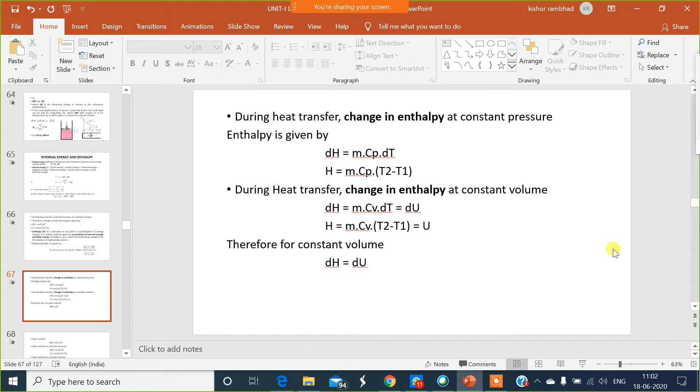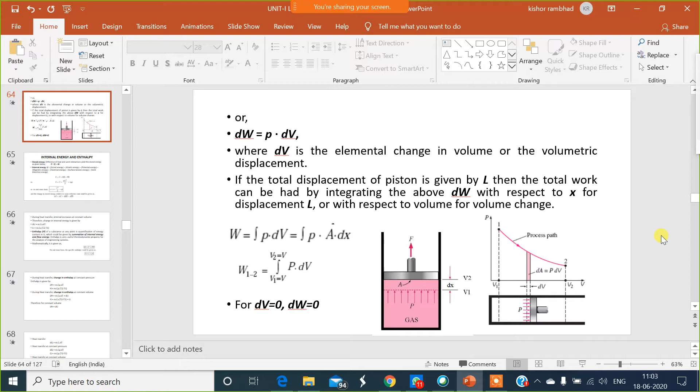Till last lecture, we have studied the work done and expression for work done for closed system. Now we'll study internal energy and enthalpy.

What is internal energy? Internal energy is a type of stored energy. And what is stored energy? Stored energy is the internal energy plus external energy. If we subtract external energy from stored energy, we get internal energy.

Now, how does stored energy get induced in the body? We merely consider external energy as the potential energy and the kinetic energy. Potential energy is the energy possessed by the body by virtue of its position. Kinetic energy is the energy possessed by the body by virtue of its motion.

Now, what is internal energy? Suppose there is a block and we are pushing it, applying some force, but that block is not moving. Even though we are applying some force, the block is not moving because it itself applies some force in the opposite direction, and that opposing force is called internal energy.

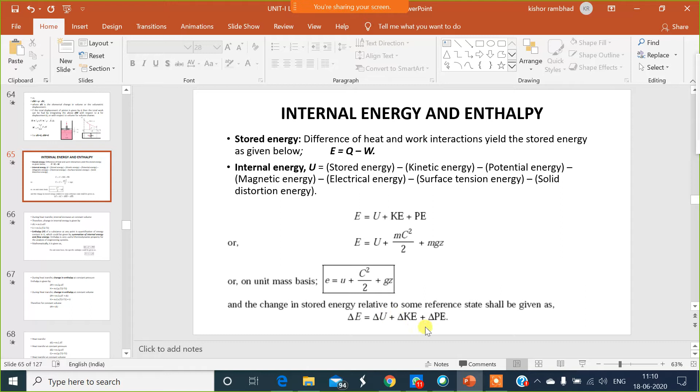During heat transfer, internal energy increases at constant volume. Listen, internal energy increases only when there is constant volume. Once the volume starts changing, internal energy stops changing this way. Therefore, change in internal energy is given by du equals m cv dt.

I told you internal energy changes only when there is constant volume, but internal energy increases or decreases because of the change in temperature. Suppose volume is constant and temperature is also constant, internal energy will also remain constant and will not change. Therefore, internal energy is a function of temperature.

Also, the change in internal energy depends upon the content, meaning mass, and the specific heat of that substance. Specific heat of a substance means its ability to carry heat.

If we define specific heat, there are two types: specific heat at constant volume and specific heat at constant pressure. Specific heat at constant volume is written as Cv, and specific heat at constant pressure is written as Cp. You might have studied this in 12th standard. Let me define specific heat.

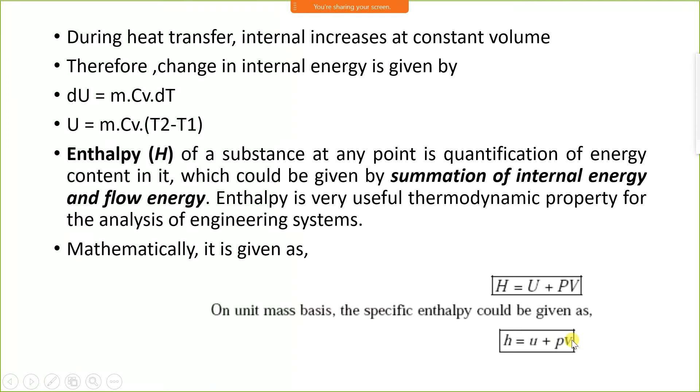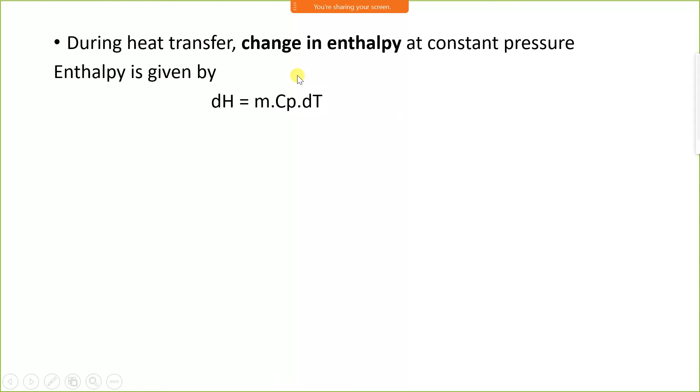During the heat transfer, change in enthalpy at constant pressure. We can supply heat at constant pressure or at constant volume. Therefore, change in enthalpy at constant pressure will be given by dH equals mCp dt. Cp is the specific heat at constant pressure, the amount of heat required to raise the temperature of a unit mass of a substance by 1 degree Celsius at constant pressure. If we integrate mCp dt, we get H equals mCp times T2 minus T1.

During the heat transfer, change in enthalpy at constant volume. At constant volume, it will be mCv dt, and mCv dt equals du, or we can write H equals mCv dt, T2 minus T1, which equals u. At constant volume, change in enthalpy is equal to change in internal energy, but at constant pressure it is different.

Therefore, at constant volume, dH is equal to du.

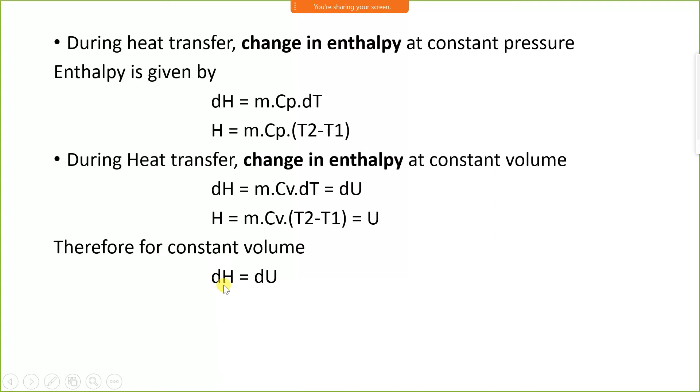Heat transfer is equal to dq, mc into dt. M is the mass of substance, C is the specific heat, dt is the change in temperature. But the value of C depends upon the type of process, whether it is a constant volume process. If it is constant volume process, we take C as Cv. If it is constant pressure process, we take C as Cp.

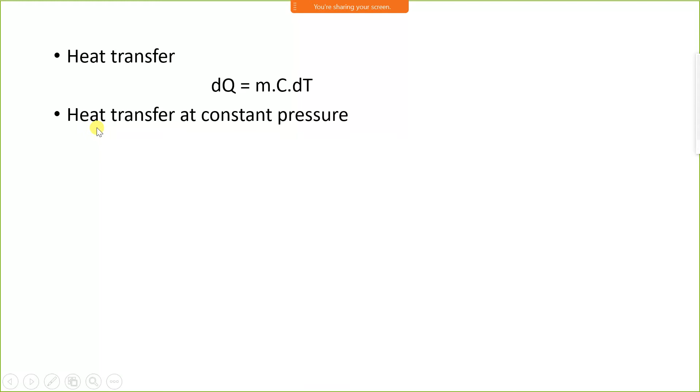For heat transfer at constant pressure, dq equals mCp dt, so q equals mCp times T2 minus T1. At constant volume process, dq equals mCv dt, which equals mCv times T2 minus T1.

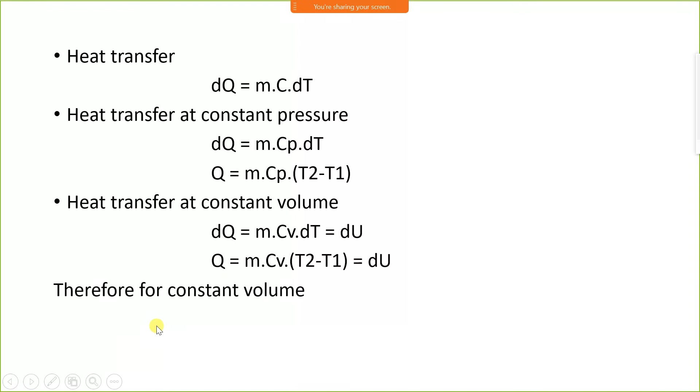At constant volume process, heat supplied is equal to change in internal energy. If the volume is constant, there is no work done. Therefore, q equals du plus w, and w is 0. Therefore, q equals du. So for constant volume, dq is equal to du.

Now we will study the steady flow system and its analysis. In this, we will study the steady flow energy equation, which is called SFEE.

Consider a system. It is an open system. What is called an open system? The system in which energy and mass crosses the boundary. Consider this is the boundary of a system. This rectangular block is the system boundary. Here, the working substance enters and the working substance leaves. Therefore, it is an open system. In an open system, mass and energy both enter and leave the system.

Here, the mass and energy are entering, and from here, energy and mass of the system are leaving. Fluid is entering at a particular height Z1 and leaving at a particular height Z2. Therefore, its height of entering and leaving is Z2 minus Z1. Heat is also entering, and as heat is entering, it is giving some work done.

At the entry of the fluid, it has properties: density as ρ1, velocity as c1, area as a1. At the outlet it has another density, another velocity, and the area is different. v1 and v2 is the volume, c1 and c2 is the velocity.

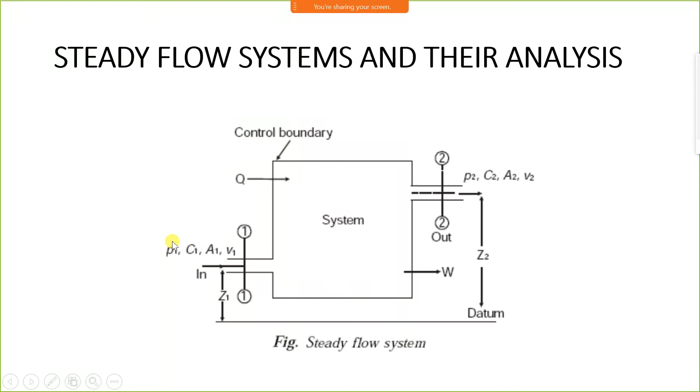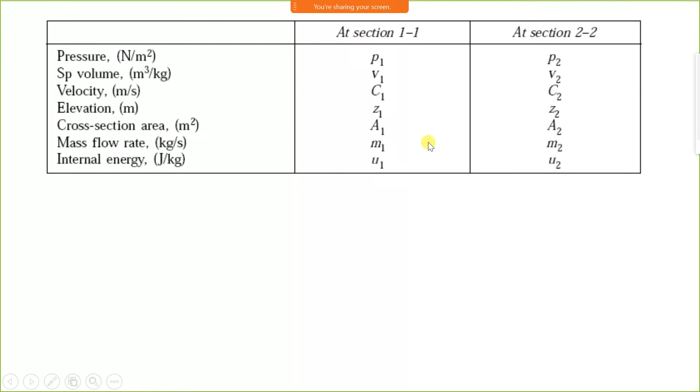These are some parameters at inlet. This is P1, not ρ1. P1 is pressure at inlet and P2 is pressure at outlet, in Newton per meter square. At section 1 it is P1, at section 2 it is P2. Specific volume V1, V2. Velocity at inlet and outlet, C1 and C2. Elevation Z1 and Z2. Cross sectional area A1 and A2. Mass flow M1 and M2. Internal energy U1 and U2.

Steady flow refers to the flow in which its property at any point remains constant with respect to time. When the fluid is moving and the flow is very steady, the property at point 1 and the property at point 2 are constant. It doesn't change with time.

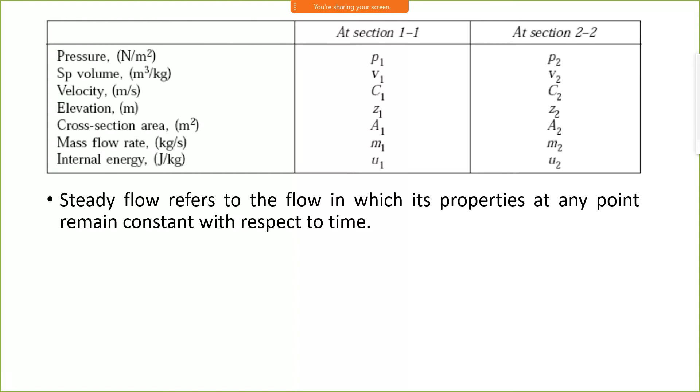A steady system is a system whose properties are independent of time. That is, any property at a point in the system shall not change with time.

Let us take an open system having steady flow. Consider the figure, which shows the steady flow system having inlet at section 1 and outlet at section 2. Heat addition is Q and work done by the system is W. Heat added to the system is Q and work done by the system is W.

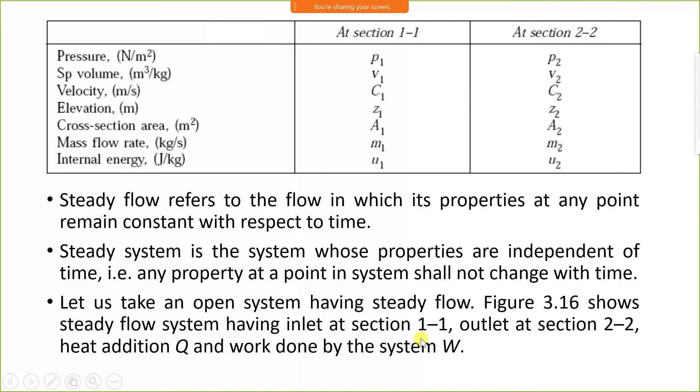Therefore, Q is equal to change in internal energy plus W, as we have seen in the last expression. Therefore, Q is equal to E2 minus E1 plus W. It should be E2 minus E1, not dE2 minus dE1.

Q plus E1 is equal to E2 plus W. If we consider the energy at inlet is equal to energy at outlet, which is called the energy balance, we shift E1 to the left hand side and E2 to the right hand side. Therefore, Q plus E1 is equal to W plus E2.

And what is E? E is the stored energy, and E is a summation of internal energy and external energy. But while considering this, we also consider flow energy.

Therefore, Q plus M1, U1 plus C1 square by 2, plus GZ1 plus P1V1, is equal to W plus M2, U2 plus C2 square by 2, plus GZ2 plus P2V2.

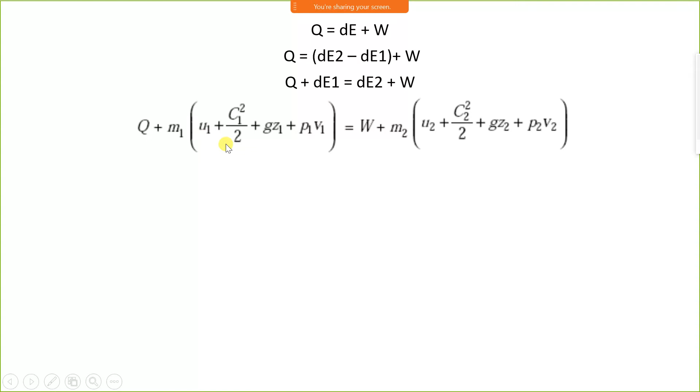We have seen that P1V1 plus U1 is equal to H1, because enthalpy is the sum of internal energy and flow energy. Therefore, we can write U1 plus P1V1 is equal to H1, and similarly H2 is equal to U2 plus P2V2.

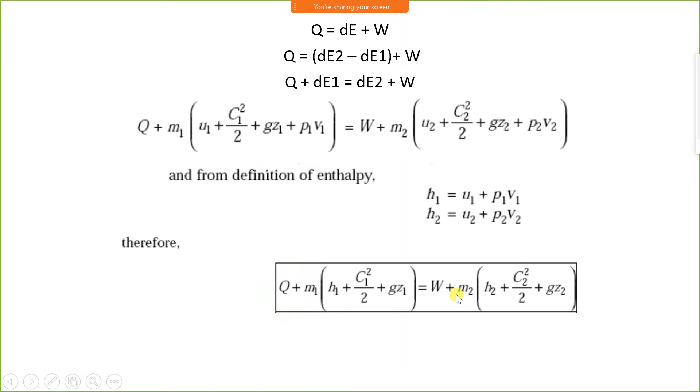Therefore, this steady flow energy equation is Q plus M1, H1 plus C1 square by 2, plus GZ1, is equal to W plus M2, H2 plus C2 square by 2, plus GZ2. The above equation is known as the steady flow energy equation, called SFEE.

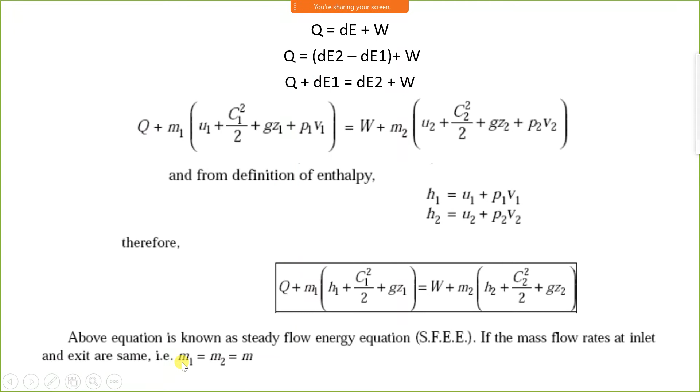If the mass flow rate at inlet and exit are the same, that is M1 and M2 equal to M, then Q plus M, H1 plus C1 square by 2, plus GZ1, is equal to W plus M, H2 plus C2 square by 2, plus GZ2. Written per unit mass, it becomes Q plus H1 plus C1 square by 2 plus GZ1 is equal to W plus H2 plus C2 square by 2 plus GZ2. This is the steady flow energy equation per unit mass.

But if we consider mass, we have to use the equation with capital Q and capital W. If we consider the steady flow energy equation per unit mass, then we write small q, small w, and everything in small letters.

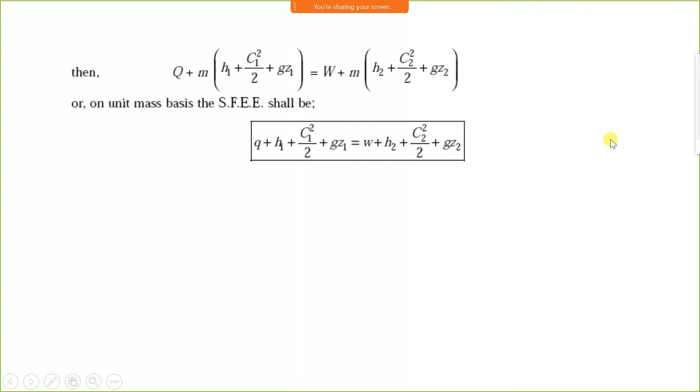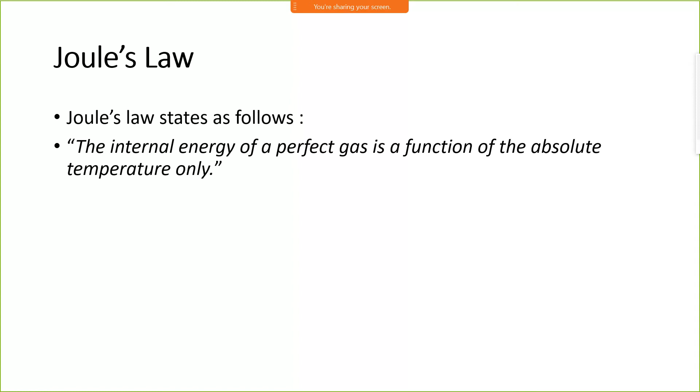Joule's law states that the internal energy of a perfect gas is a function of absolute temperature only, as I explained in the internal energy expression. That is Joule's law.

Relation between the two specific heats. The two specific heats are Cp and Cv. We'll see the relation between specific heat Cp and Cv.

Cp minus Cv is equal to R. Now what is R? R is the gas constant. There are two types of R: one is the universal gas constant, and the second is the characteristic gas constant. The universal gas constant is written as R bar or R degree, and only R is written for the characteristic gas constant. The characteristic gas constant is the gas constant of a particular gas. Every gas has its own characteristic constant, like air, nitrogen, hydrogen, oxygen, and the value of R for every gas is different. But there is only one universal gas constant, whose value is 8.314 kilojoule per kmol Kelvin.

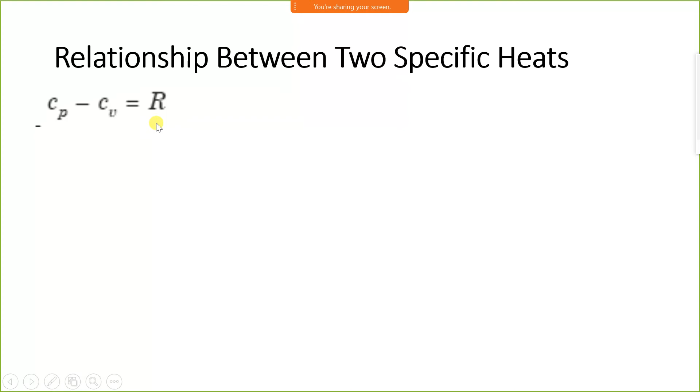Cp minus Cv is equal to R. The ratio of specific heats is the ratio of specific heat at constant pressure to the specific heat at constant volume, represented as Cp upon Cv, given the symbol gamma. Gamma is called the ratio of specific heats, and is equal to specific heat at constant pressure upon specific heat at constant volume.

If we divide this equation by Cv, then it will be Cp upon Cv minus 1 is equal to R upon Cv.

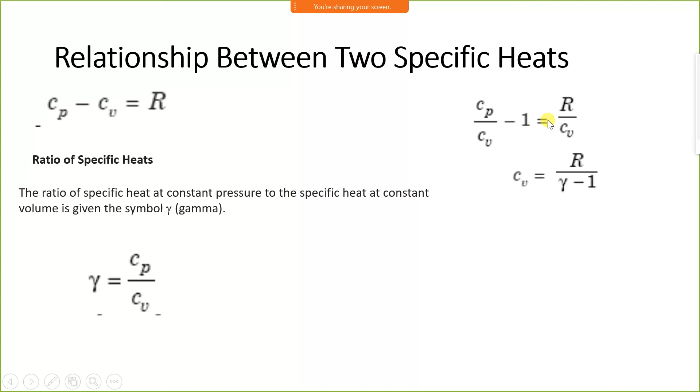Then if we take Cv common, then this equation becomes gamma minus 1. So, Cv is equal to R upon gamma minus 1. Look at here, Cp upon Cv is gamma. Therefore, gamma minus 1 expression will be gamma minus 1 is equal to R upon Cv. Then if you take Cv to left hand side and this portion to right hand side, it becomes Cv is equal to R upon gamma minus 1.

Now, engineering application of steady flow energy equation. First is water turbine. In a water turbine, this turbine rotates by the action of water. As the water flows and the water jet strikes on the turbine blade, the turbine rotates.

The water comes from a particular height, and that height is taken from the center of the turbine. That height is Z1, and Z2 is 0, because Z2 is taken at the center line. Therefore, Z1 minus Z2 is equal to Z1 itself.

This turbine is connected with a generator. Generator generates the power. As the turbine rotates, it generates power, and this is the system boundary. Since it is a water turbine, cold water is supplied. Therefore, there is no internal energy or enthalpy. Only potential energy and kinetic energy will be associated with it. No heat transfer because it is cold water.

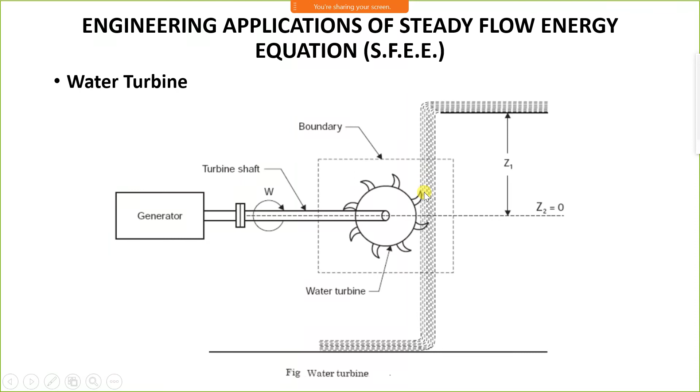Refer to figure 4.32. In the water turbine, water is supplied from a height. The potential energy of the water is converted into kinetic energy. When the water is stored here, it has potential energy, and when it falls down onto the turbine, it changes its potential energy into kinetic energy. Then it enters into the turbine, and part of it is converted into useful generated energy.

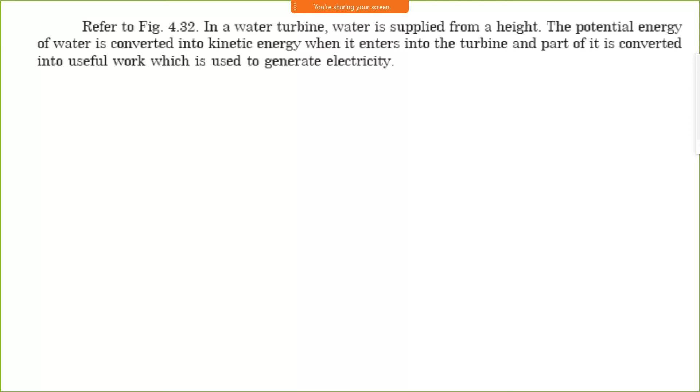Since it is a cold turbine, there will not be any enthalpy or internal energy because there is no interaction of temperature, and therefore no heat. Since the turbine is rotating and giving work done, potential energy and kinetic energy will be there. Considering the center of the turbine shaft as datum, the energy equation can be written as U1 plus P1V1 plus GZ1 plus C1 square by 2 plus Q is equal to U2 plus P2V2 plus GZ2 plus C2 square by 2 plus W.

Now here, no heat transfer, so Q is 0. U1 is 0, U2 is 0, GZ2 is 0, therefore that term is 0. U2 minus U1 is 0, V1 minus V2 is also 0 because volume is constant, and Z2 is also 0. V1 and V2 are constant because the same amount of water is entering and leaving. Therefore we can write V1 is equal to V2 is equal to V.

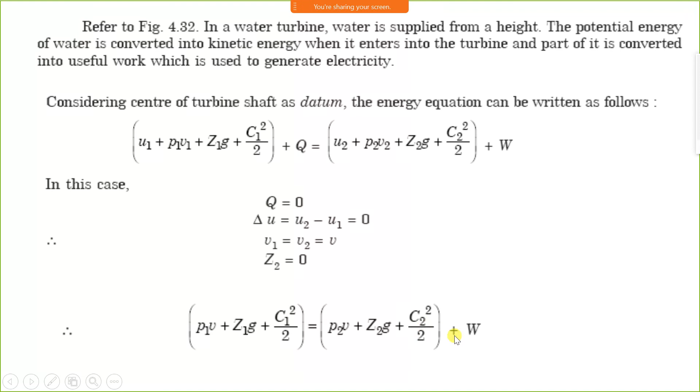Therefore, P1V plus GZ1 plus C1 square by 2 is equal to P2V plus GZ2 plus C2 square by 2 plus W. This is the final equation for the water turbine.

For steam or gas turbine: consider this turbine as the system. This turbine is connected with a generator, and it gives power. Means we are getting power, means the system is giving work done. We have to consider work done.

Since it is a steam or gas turbine, in the steam turbine we have to convert water into steam by application of heat. That means we have to consider internal energy and enthalpy here. In the gas turbine also, gas is heated and supplied — hot gas or hot steam is supplied to the turbine. Therefore, we have to consider interaction of heat and temperature.

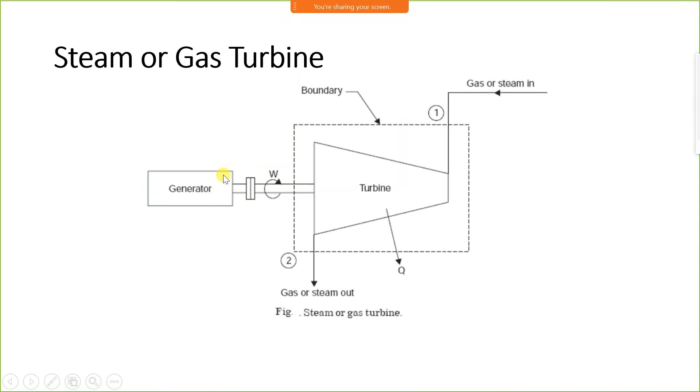We consider that the change in kinetic energy at inlet and outlet is 0. Change in potential energy, we consider that the datum level from inlet to outlet is 0. Therefore, potential energy and kinetic energy in this case are 0. Heat we have to consider because we are heating the fluid — water or gas. We have to consider work done, and since it is hot, we have to consider internal energy and enthalpy.

In the steam or gas turbine, the steam or gas is passed through a turbine and part of the energy is converted into work in the turbine. The output of the turbine runs a generator to produce electricity as shown in the figure. The steam or gas leaves the turbine at a lower pressure or temperature.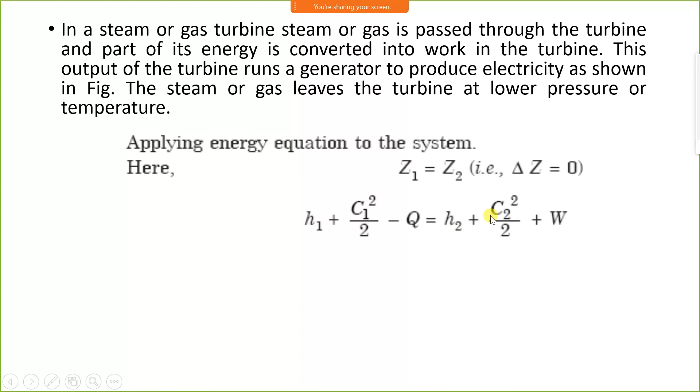Applying the energy equation, there is no change in datum, therefore Z1 equal to Z2, which means delta Z equal to 0. H1 plus V1 square by 2 minus Q is equal to H2 plus V2 square by 2 plus W. But most of the time, kinetic energy at inlet and kinetic energy at outlet is the same. Therefore, we do not consider it most of the time.

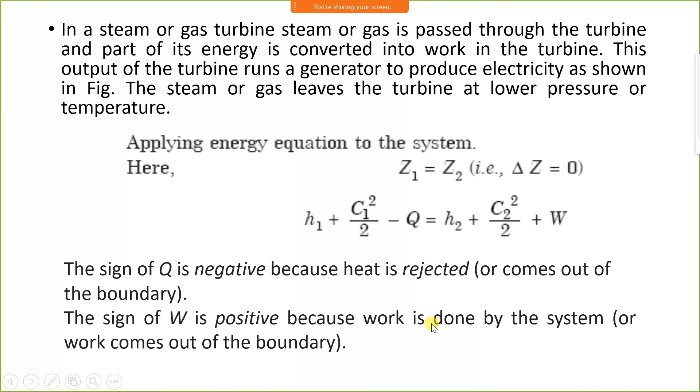Here Q is negative because heat is rejected from the system or comes out of the boundary. Thus W is positive because work is done by the system.

Centrifugal pump. Centrifugal pump takes water from a well or a pond which is below the centrifugal pump. Therefore, the height from the pond or the well to the centrifugal pump center is Z1, and the centrifugal pump pushes the water to an overhead tank, and the level of that overhead tank is taken as Z2.

Here we have to supply work done to the centrifugal pump. We have to supply work done to a centrifugal pump. Therefore, we are supplying work, and that work is negative.

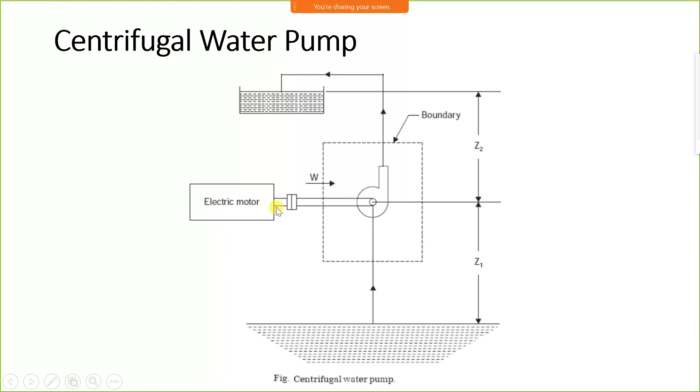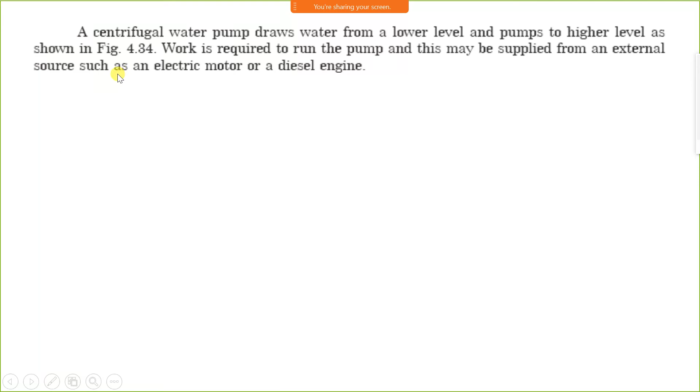The centrifugal water pump draws water from the lower level and pumps it to a higher level as shown in the figure. Work is required to run the pump, and this may be supplied from an external source such as an electric motor or diesel engine. Here Q is 0 and change in internal energy is 0, because the pump takes cold water and supplies cold water. It does not increase the temperature of the water. Therefore, heat interaction and internal energy interaction is 0, and there is no change in temperature of water.

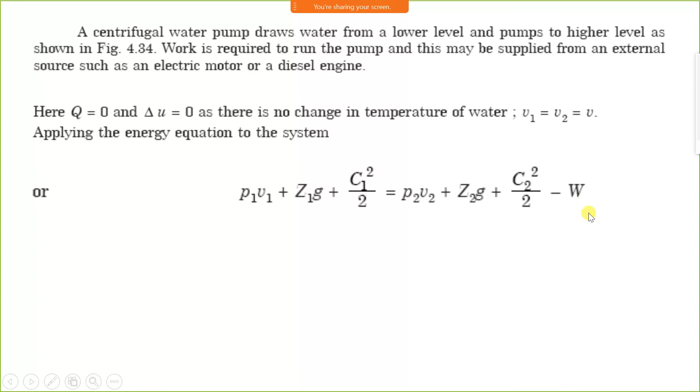At inlet and outlet, velocity remains constant. Therefore, there is no change in kinetic energy. Applying the steady flow energy equation, P1V1 plus GZ1 plus V1 square by 2 is equal to P2V2 plus GZ2 plus V2 square by 2. Here we have taken minus W because it absorbs the work. The work is negative because work is done on the system.

Centrifugal compressor. Now, the centrifugal compressor is a device which compresses the gas, which compresses the air. When the air or gas is compressed, its pressure increases and the volume decreases. But while doing compression, temperature also increases.

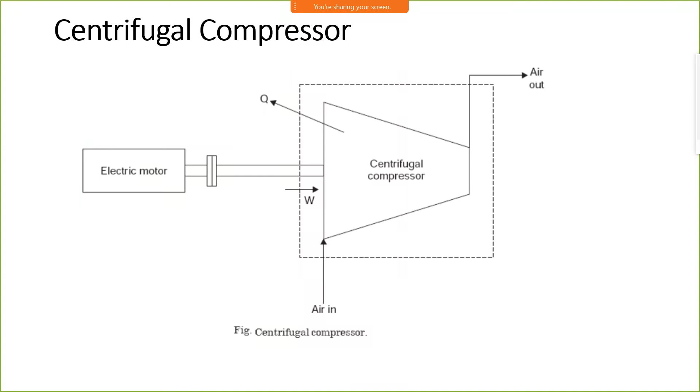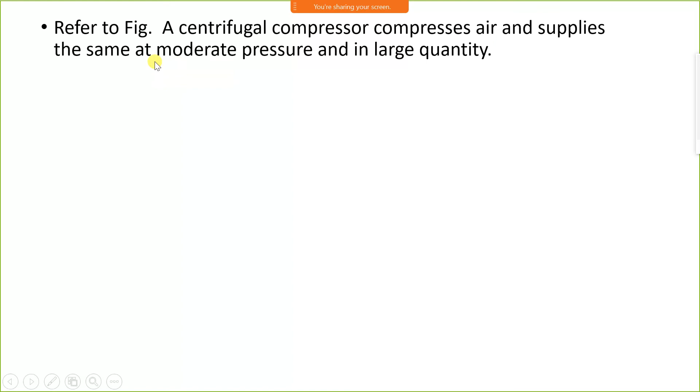This is the system boundary, air inlet and air outlet. The figure refers to the centrifugal compressor which compresses the air and supplies the same at a moderate pressure and a large quantity. Applying the energy equation to the system.

The change in datum level is equal to 0. Therefore, H1 plus V1 square by 2 minus Q is equal to H2 plus C2 square by 2 minus W. While compression, it increases the temperature and heat is rejected from the compressor. Therefore, minus Q is written, and energy is required. Electrical energy is required or some external source is required to run the compressor. Therefore, minus W.

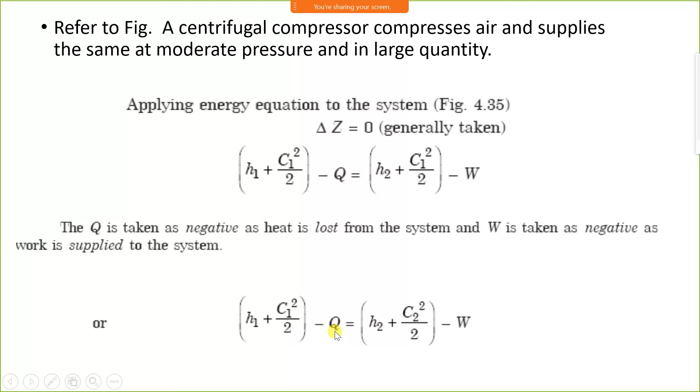The Q is taken as negative as heat is lost from the system, and W is taken as negative as the work is supplied to the system. Or H1 plus C1 square by 2 minus Q is equal to H2 plus C2 square by 2 minus W.

Then the reciprocating compressor, the same as the centrifugal compressor. Reciprocating compressor also has this piston and this cylinder. The reciprocating compressor is a compressor which comprises of piston and cylinder. The piston reciprocates inside the cylinder. Therefore, this compressor is called a reciprocating compressor.

Now, to run the compressor, we have to supply some work. We have to supply electricity, or use some external source to run the compressor. While compression, temperature increases, therefore it rejects heat.

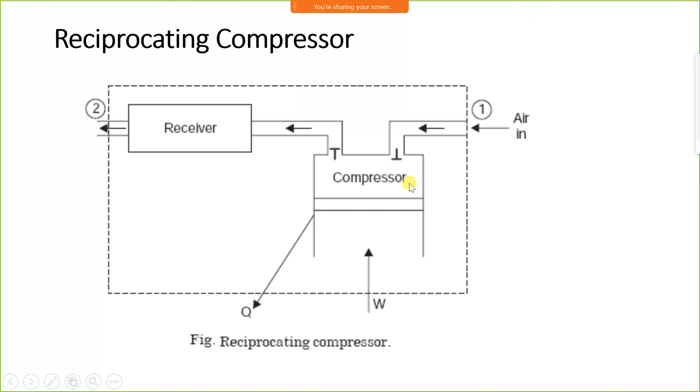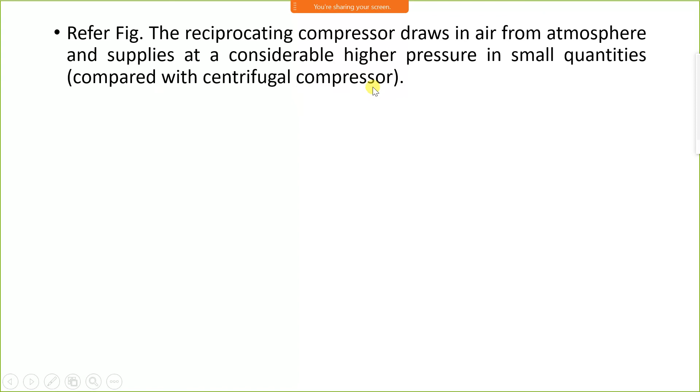Applying the steady flow energy equation, consider change in potential energy is zero, change in kinetic energy is zero, meaning inlet and outlet velocity is the same, and we are considering the inlet and outlet at the same level, same datum. Therefore, change in potential energy is equal to zero, since the changes are negligible compared with the other energies. Therefore, H1 minus Q is equal to H2 minus W. This is the equation.

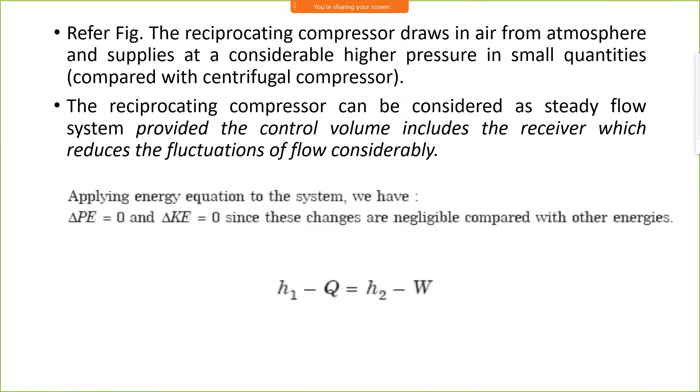Condenser. Condenser is a heat exchanger which is used for heat transfer. Condenser is used for cooling purpose.

In our household refrigerator, at the back side, there is a black colored coil, that is a condenser. From the condenser, refrigerant moves and exchanges heat with the atmosphere. Since in the condenser the refrigerant rejects heat, the temperature of the refrigerant decreases, and it is called a cooling device. That cooling device is a condenser.

In the condenser, water enters and leaves, and from the other direction steam enters and leaves. Steam is entering at a higher temperature and leaving at a lower temperature. Water is entering at a lower temperature and leaving at a higher temperature.

Suppose steam is entering at 100 degrees Celsius and its temperature decreases to say 50 degrees Celsius. There is a difference of 50 degrees Celsius. Where does that temperature go? It is absorbed by the cold water.

Suppose the initial temperature of water is 30 degrees Celsius and it increases to 80 degrees Celsius. The temperature of water is raised by 50 degrees Celsius, and the temperature of steam decreased by 50 degrees Celsius. Steam is in gas form. When the steam exchanges heat with the water, it condenses into water.

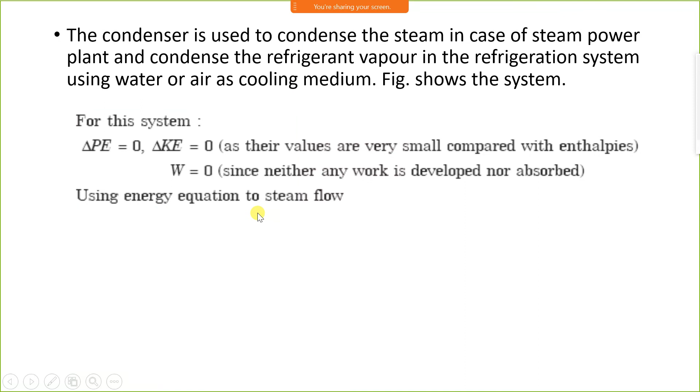Using the steady flow energy equation, H1 minus Q is equal to H2. This is because work done is zero here. Therefore, Q is equal to H1 minus H2, where Q is the heat lost by 1 kg of steam passing through the condenser. Here we are considering 1 kg of system.

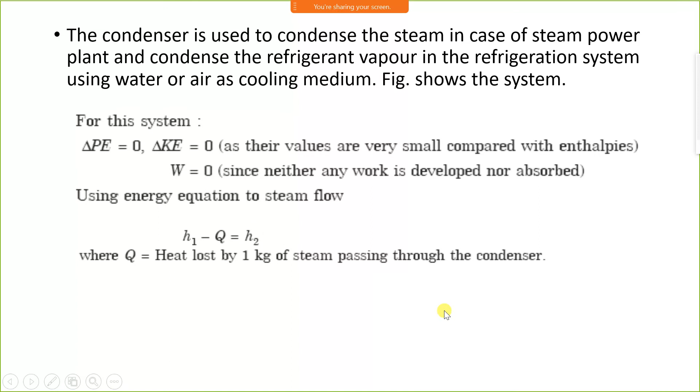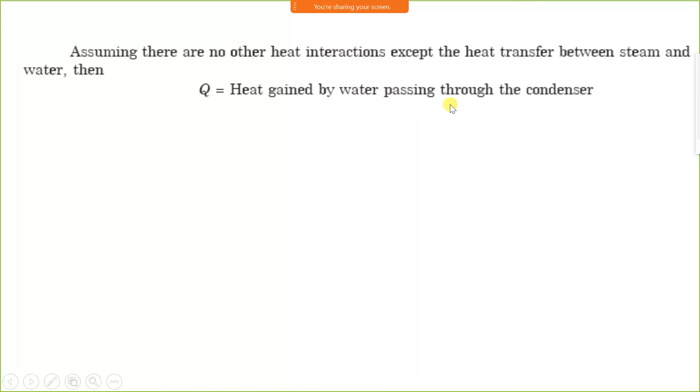Assuming there is no other heat interaction except the heat transfer between the steam and the water, Q is equal to the heat gained by the water passing through the condenser.

Therefore, mass of steam times H1 minus H2 is equal to mass of water times CW, TW2 minus TW1. This is the energy balance equation.

If we consider the steam and the water, the temperature of water changes and the temperature of steam also changes.

The heat lost by the steam is equal to the heat gained by the water. The energy balance will be: heat lost by the steam equals heat gained by the water. Heat lost by the steam is equal to mass of steam, specific heat of steam, and change in temperature of steam, and heat gained by the water is equal to mass of water, change in temperature of water, and specific heat of water.

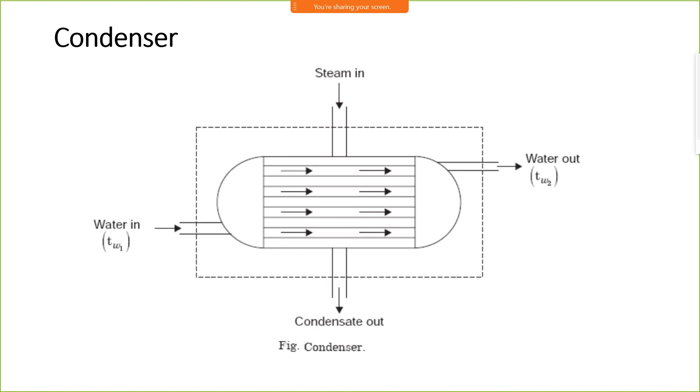The multiplication of temperature and specific heat gives the enthalpy. Therefore we are taking mass of water times change in enthalpy of water is equal to mass of steam times specific heat of steam times change in temperature of steam. You can take this as water and this as steam. The notations given are the same, no problem.

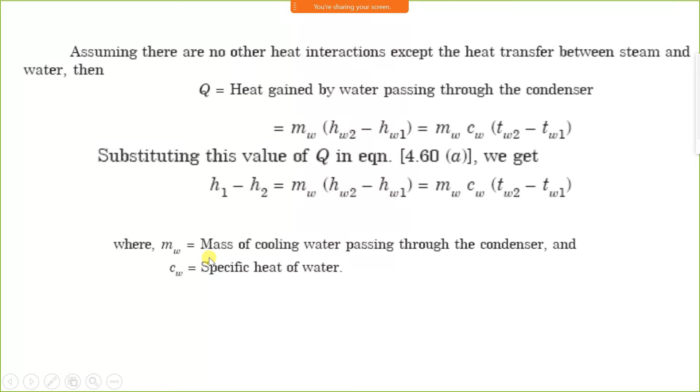Substituting the value of Q, we get MS, H1 minus H2, is equal to MW, HW2 minus HW1, which is equal to MW, CW, TW2 minus TW1, where MW is the mass of cooling water passing through the condenser and CW is the specific heat of water.

For the evaporator, we will take it up in the next lecture.